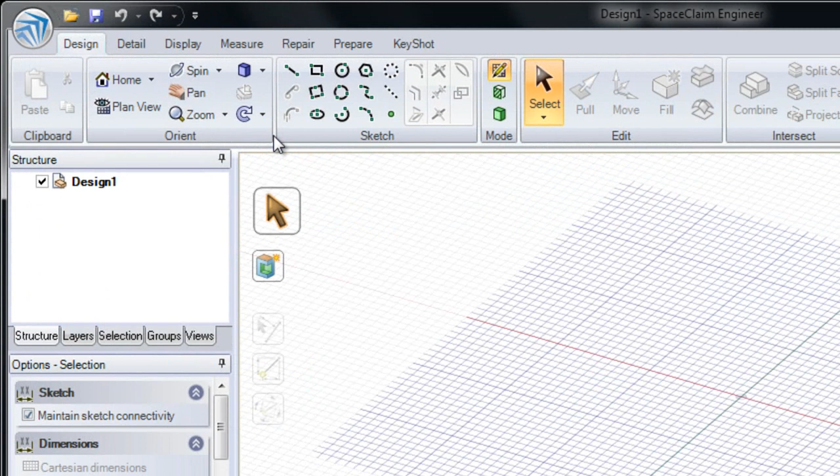In this exercise, we're going to look at how copy and paste can help you build parts around surrounding geometry. We start with this component, and we want to build a mating flange for it. Notice that inside our component, we have a single solid.

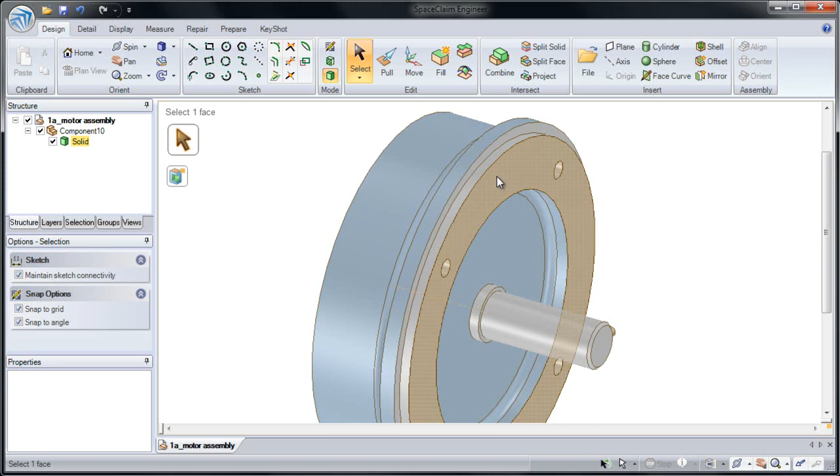We're going to be using copy and paste to first grab surfaces from our original solid and build a mating solid to it. So I'm going to select our large mating face here and Control-select the smaller one next to it. Once I have these two faces selected, I can click Copy in our clipboard and then click Paste. You'll notice it pastes them into the exact same location.

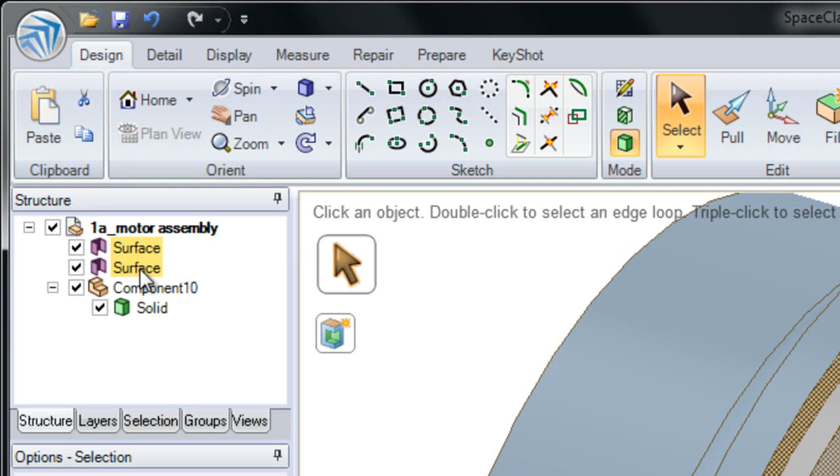To see them better, I'm going to hide our component. Now we have two surfaces, and we can use Pull to thicken them into a solid. I'll grab both surfaces and drag them to thicken them, and type in a value of 30.

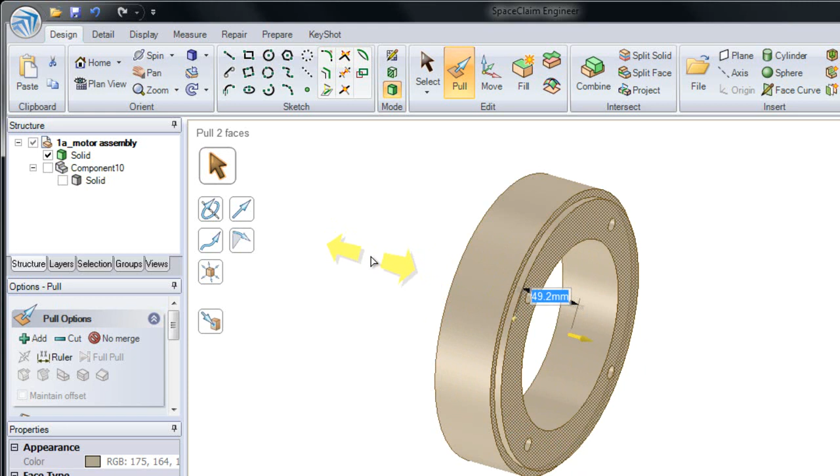By using the mating faces from our original solid, we automatically have a lot of the detail necessary. We have a lip on the other side, and we have our 4 mounting holes.

Once you copy and paste geometry, though, it doesn't have to stay the same. We could always take a single face and pull it independently, so we can pull it up or down, or click 'up to' and click on our other face. By not having an extra notch, we'll save some manufacturing costs later on.

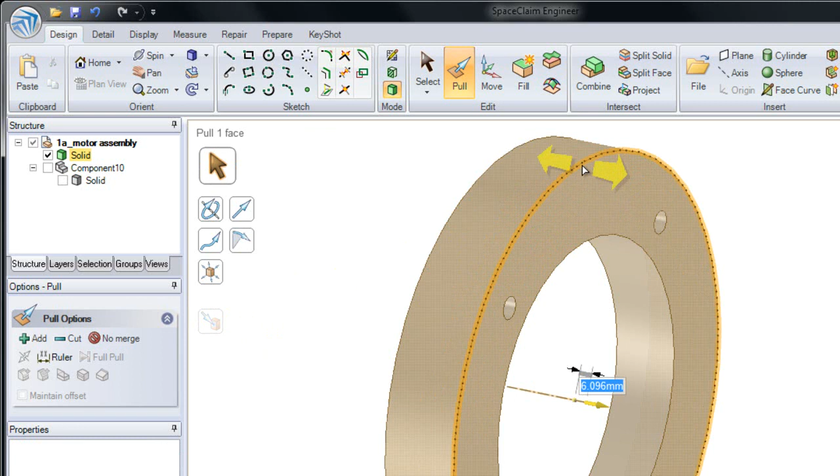Now there's a few other changes we may want to make to this model. I may want to make a counterbore hole on all 4 of these. So let's look at a really fast way to do this.

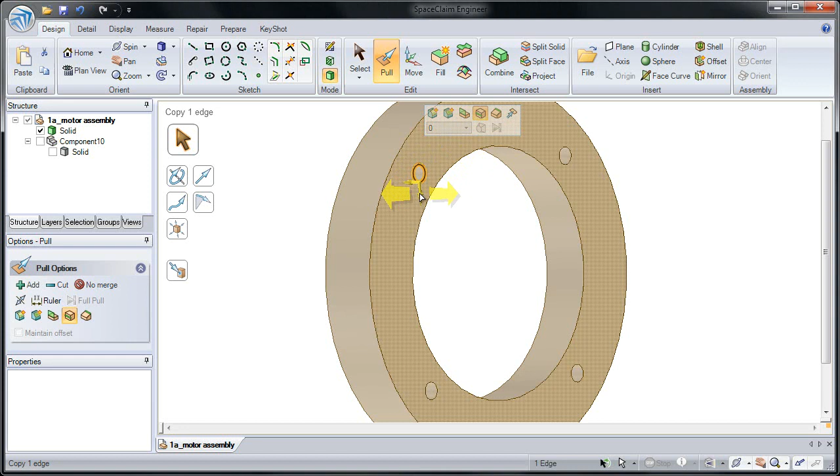I'm going to do this by clicking on an edge and clicking the Copy Edge button. This lets me copy this edge outward a given distance, like 5. Now I'll be able to click on that face and pull it down to make a counterbore hole. But let's undo twice with Control-Z.

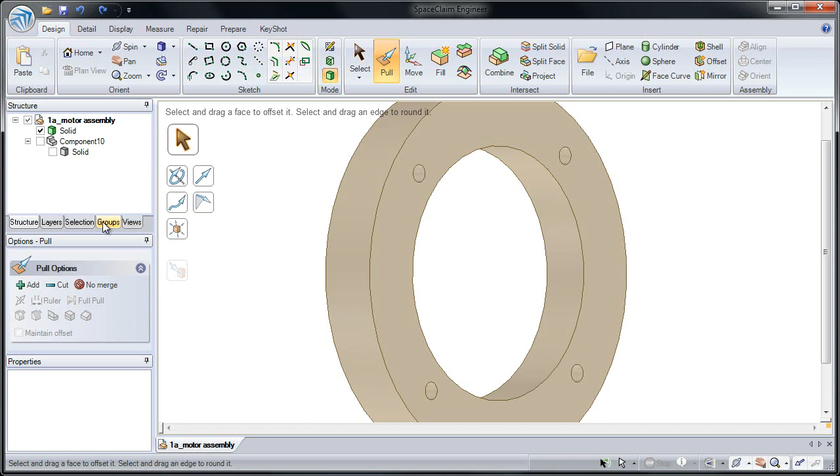An even faster way to make this change would be to use Power Select. This will enable me to grab all of the edges at the same time. If I click that edge, it finds edges the same length in the same face, or edges the same length in the other faces.

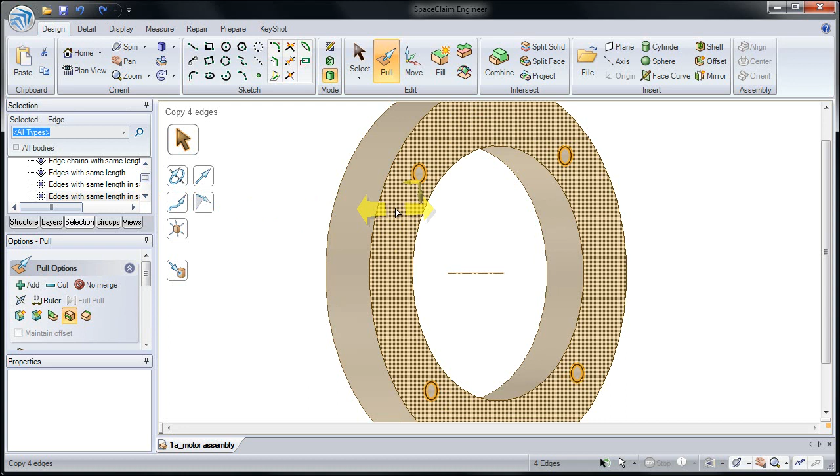Now that I have all 4 of the top edges, I can copy them outward by 5 at the same time, or click on our face, grab faces with same area, and pull them in at the same time.

And so we've been able to make these changes starting with a simple copy and paste. We used copy and paste and then make these changes with Copy Edge and Power Select.

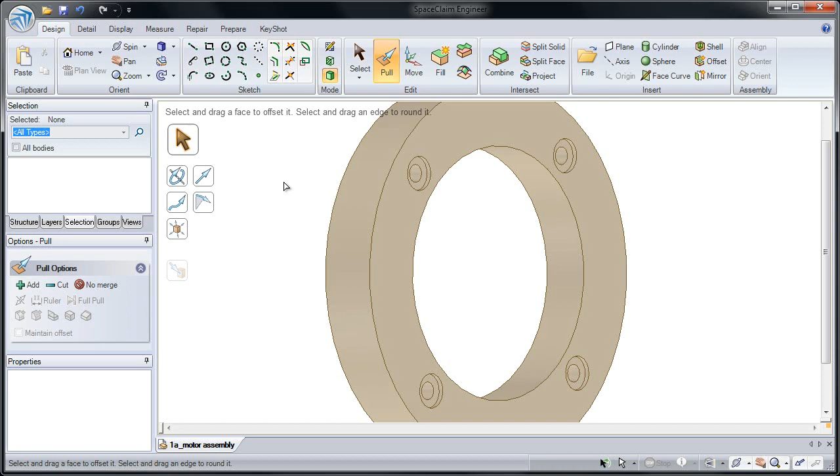Now that we've finished our mating holes, let's bring back our original solid, component 10. We may have to mate something to the other side of this, so I'm going to click on this cylinder and pull it out larger. We'll type a new value in of 150.

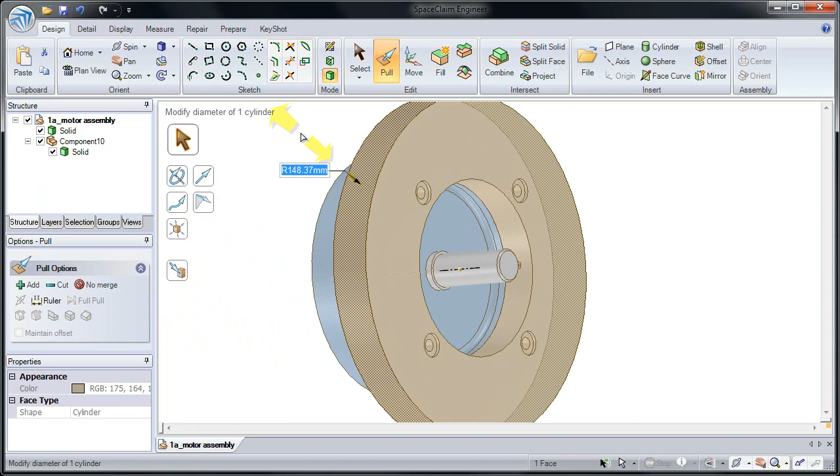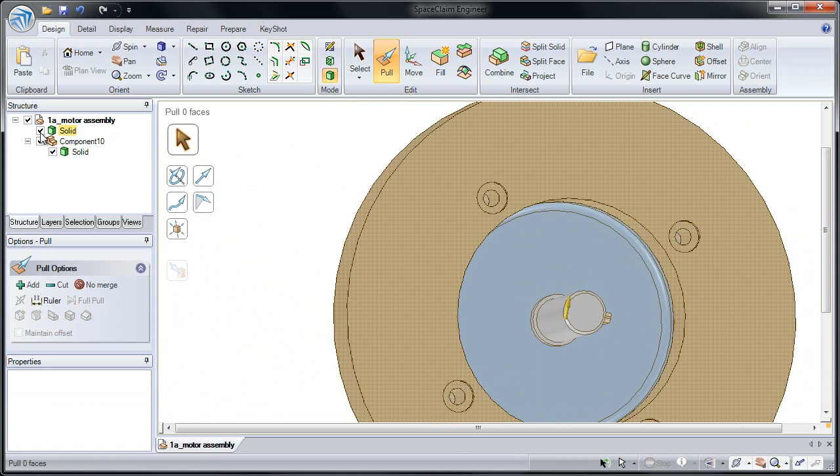I want to create a bolt hole pattern on this side of our model, and I want to use the bolt pattern that we already have. So what I'm going to do is copy and paste an entire feature. Let's hide component 10 again.

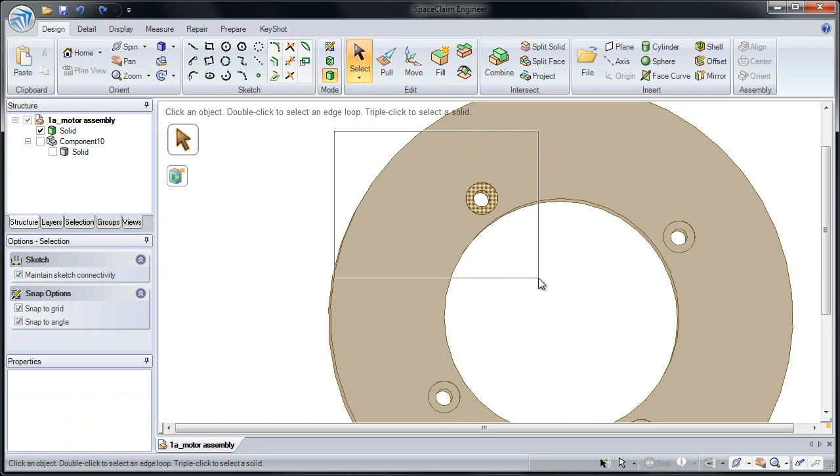I'm going to box select one of our holes and go to Copy and Paste. Notice it pastes that surface into the exact same spot. Let's undo once. Instead, I'm going to box select, hit the Copy button, and now rotate to the other side. If I click on this face and hit the Paste button, it will paste in exactly where I clicked.

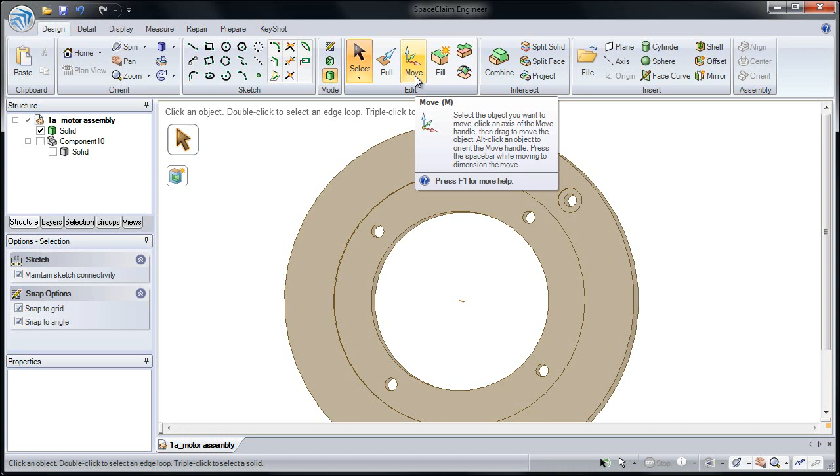Now that it's on the other side of our model, we can always use our Pull and Move tools to edit its location. I can box select that bolt hole and dimension it to the center of our circle. Instead of 127, we may want it to be 130.

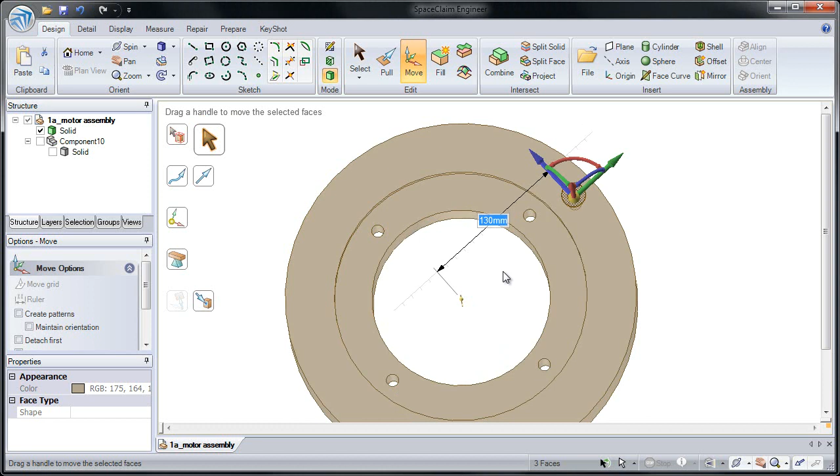And now instead of having one bolt hole, we may want to have several. So to make a pattern, we'll drag our Move tool to the center, click the Create Pattern button, and pattern this around the object. Let's make a pattern of 6.

So what we just saw was copying and pasting a feature from one side of our model to the other, and then creating a bolt hole pattern from it.

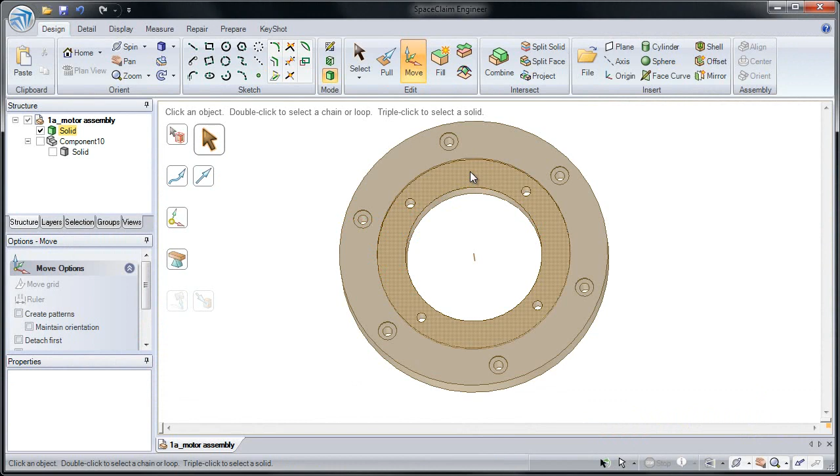Lastly, let's look at copying and pasting from one solid into another. Let's bring back our original solid. We may want to offer a little bit more protection on this pin.

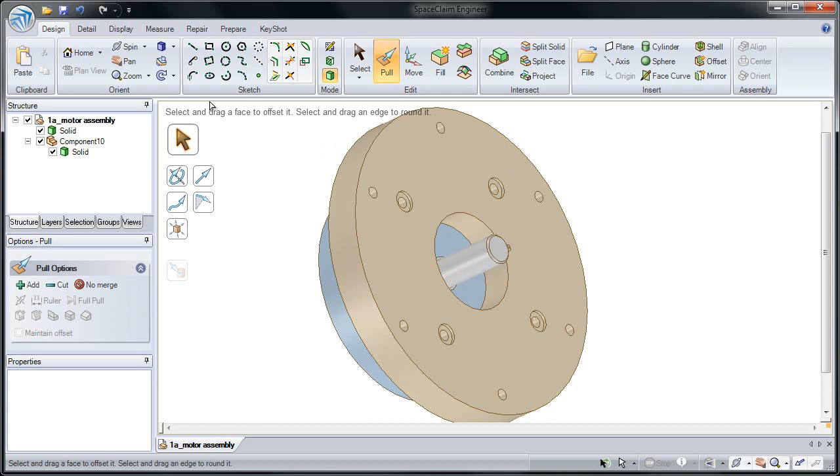So we can pull our inner face to make it a little bit smaller, but we may have a better solution. We may have built a similar part last week, and I want to take part of that model, copy it, and paste it in this design. So I'm going to go to our Open button, and let's open up 1B, small flange.

Here I have a small flange, and I want to copy and paste just the cylindrical region from this design to the other. An easy way to do this is to use Split Solid.

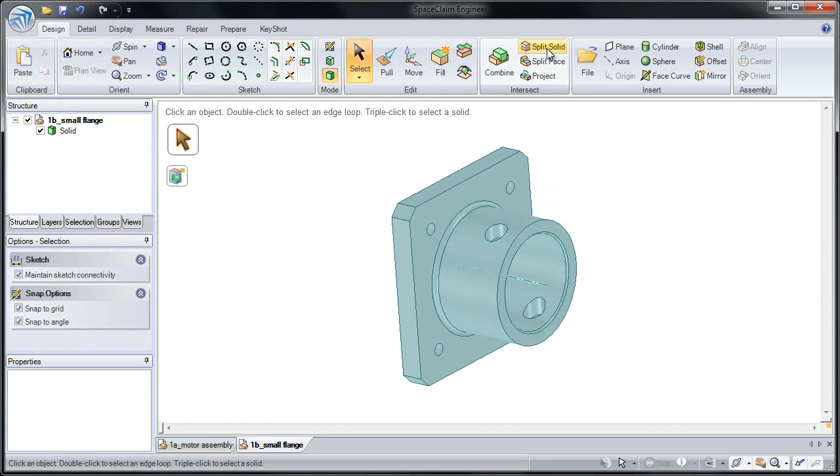Split Solid lets us select a target object and cut it with one of the faces. Now it's been cut into 2 separate solids. I'll click on our bottom region to remove it.

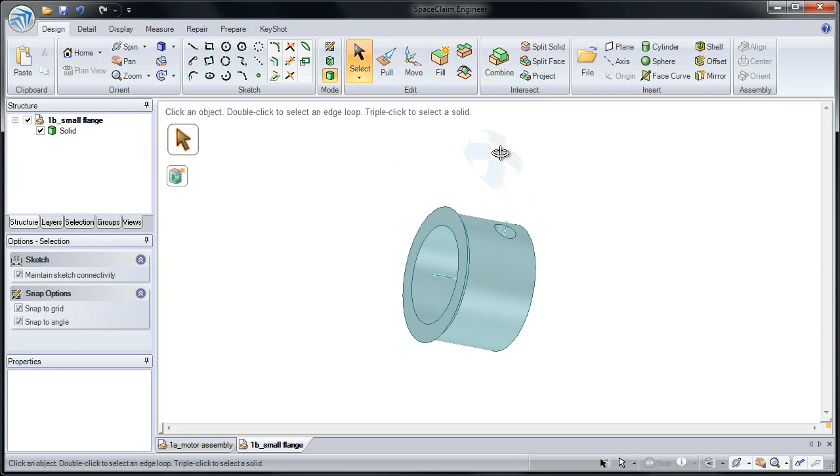Now that I have isolated the section I want, I'll box select an entire body, go to our clipboard and copy it with Control-C, go to our initial design, and paste it in.

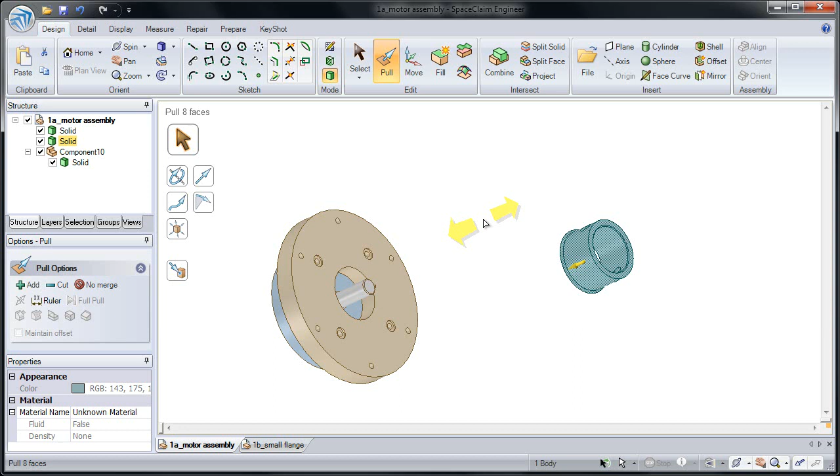Notice it pastes in to whatever location it was in relationship to the world origin, so it may not come to the right spot. If this happens, we'll use the Move tool to move it to the correct location.

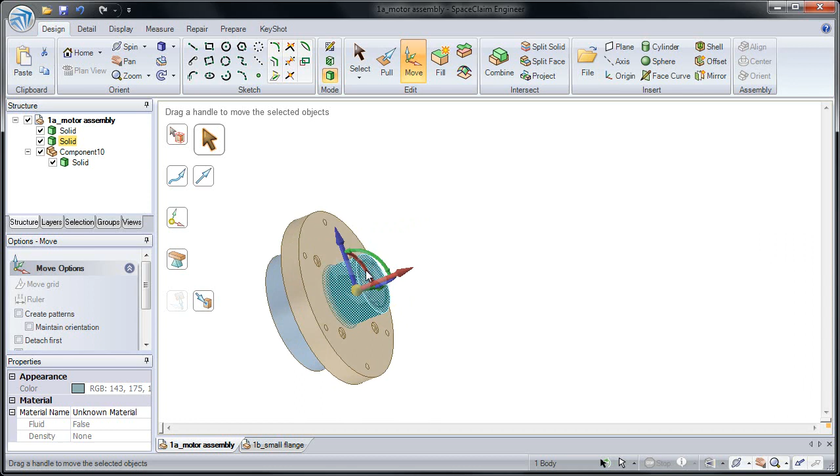And I'll start by moving it up to our cylindrical face. Notice it automatically snaps it so it's centered. Now let's click on the red arrow and drag it up.

We want to make the 2 faces coincident, so I'll put the Move tool on the bottom edge, and then in the red direction we'll go up to the orange face. Now it's exactly where I want it to be.

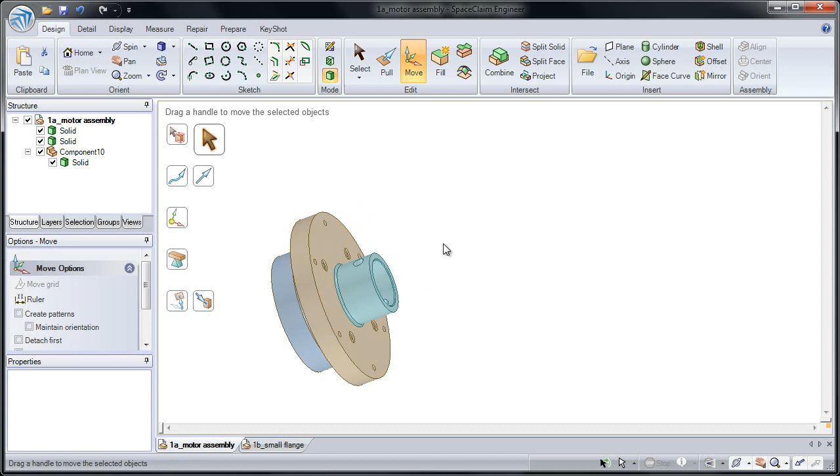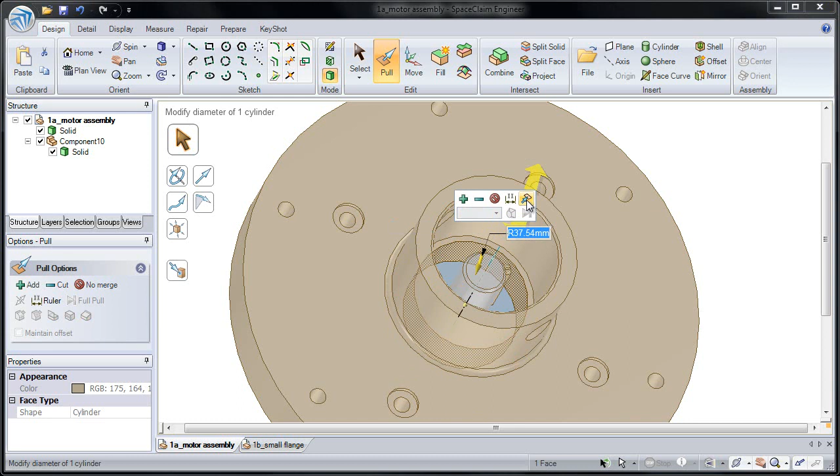And I can use Combine to merge these 2 objects together. Select the first solid and Control-select the second one. Now we have the part merged into our original model, and I can simply click on any of the faces to snap them to the correct size, pulling a face up to our face we pasted in.

So I hope you've seen 3 different copy and paste methods. First, copy and pasting surfaces to start another solid, copy and pasting features from one side of a model to another, and copy and pasting bodies from one design to another.